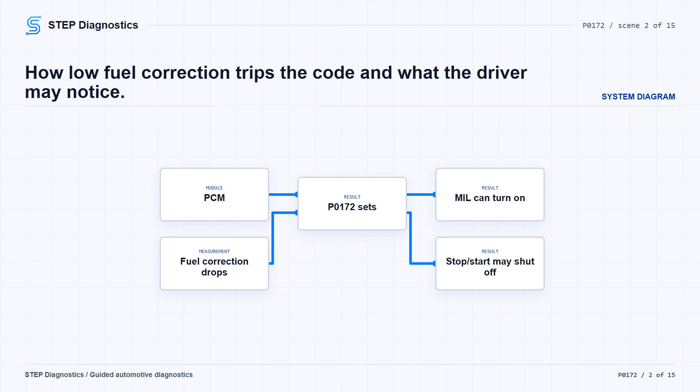Possible fault areas can include fuel delivery, injector leakage, purge flow, air or exhaust restriction, MAP input, oxygen sensor wiring or sensor operation, engine mechanical issues, and only after the diagnostic path supports it, the PCM.

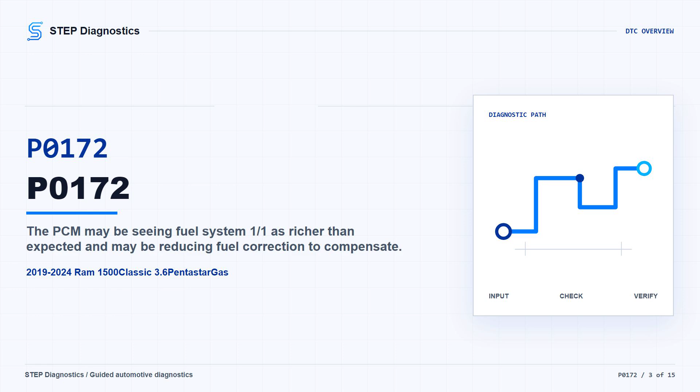The fuel target is based around 14.7:1. For this fault, when the combined short-term and long-term correction drops less than a calibrated threshold, generally 67%, with 100% nominal, the fail timer increments. After 30 seconds of fail time, the diagnostic fails.

Before chasing the rich code, start with the basic system checks. Then start the engine and reproduce the operating conditions that allow this monitor to run. Treat the running conditions as a monitor gate.

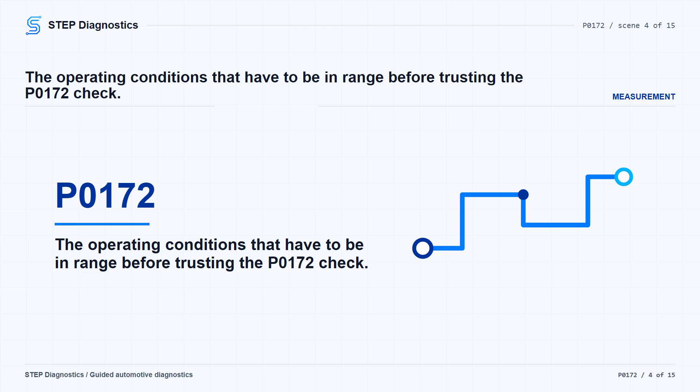Closed-loop fuel control with the engine running, battery voltage above 11.0 volts, barometric pressure greater than 75 kPa, ambient temperature above -7 degrees C (20 degrees F), fuel level greater than 12%, and altitude below 2,590 meters (8,500 ft). Use the scan tool to read and record the codes.

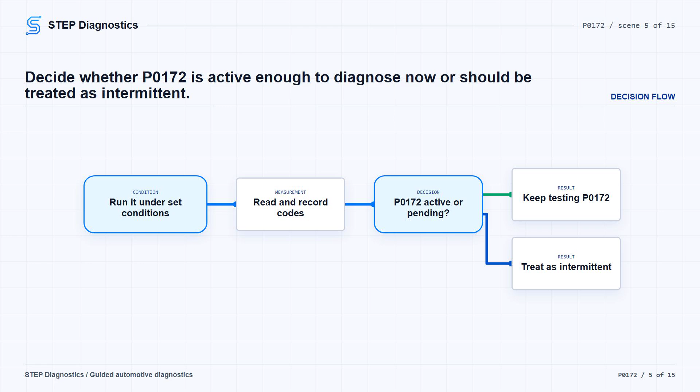It may take a road test, and the best path is to repeat the captured conditions from when the fault originally set. If P0172 is active or pending, continue the diagnostic. If it is not active or pending, handle it as an intermittent condition rather than forcing a hard fault diagnosis.

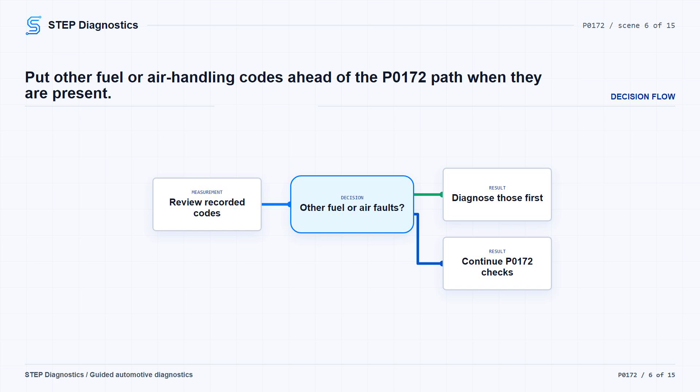Next, look at the recorded codes. If other fuel or air handling faults are active or pending, diagnose those first, because this rich code can be set by a bad oxygen sensor signal or wiring, but it is more commonly driven by a mechanical, fuel, or air handling problem. If there are no other active or pending fuel or air handling faults, continue with the P0172 path.

Now check the exhaust system for restriction. Start the engine, confirm good exhaust flow at the tailpipe, and visually inspect the exhaust for damage that could create a restriction. If you find a problem, make the appropriate repair and verify the repair.

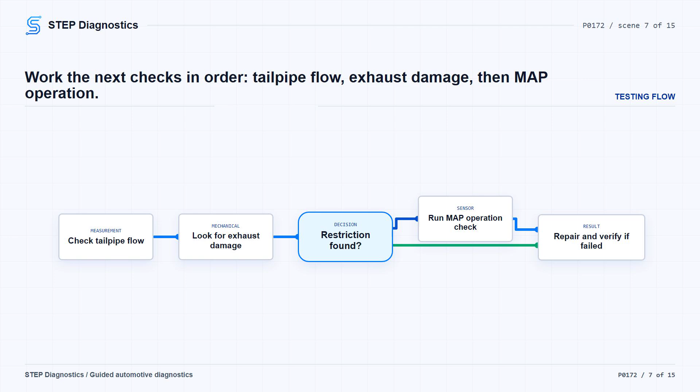If the exhaust checks out, move to MAP sensor operation. Run the MAP sensor operation check. If that check finds a problem, repair it and verify. If it does not, keep moving in order.

With the ignition off, disconnect the hoses at the purge solenoid. Apply 5.0 in Hg to the engine side of the purge solenoid with a hand vacuum pump. The solenoid should hold vacuum for a minimum of 15 seconds.

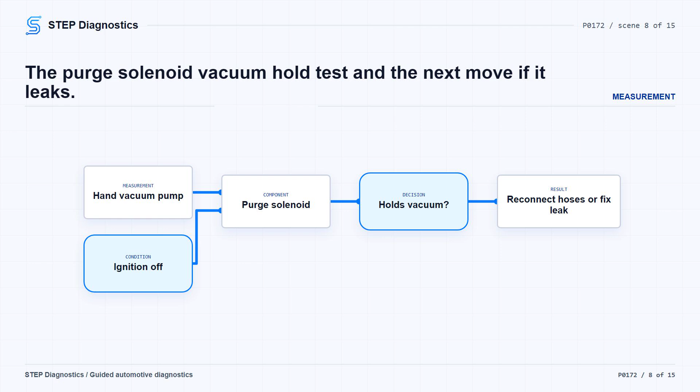If it holds, reconnect the vacuum hoses before continuing and go to the fuel delivery check. If it does not hold, first verify good pin-to-terminal contact at the evap purge solenoid and PCM connectors. If the connectors are okay, replace the purge solenoid, then verify the repair.

Next, check the fuel delivery system. If that test finds a fuel delivery problem, make the appropriate repair and verify. If fuel delivery checks good, inspect the engine mechanical side.

The air induction system must be free of restriction, valve timing and compression must be within specifications, and the fuel must be free of contamination.

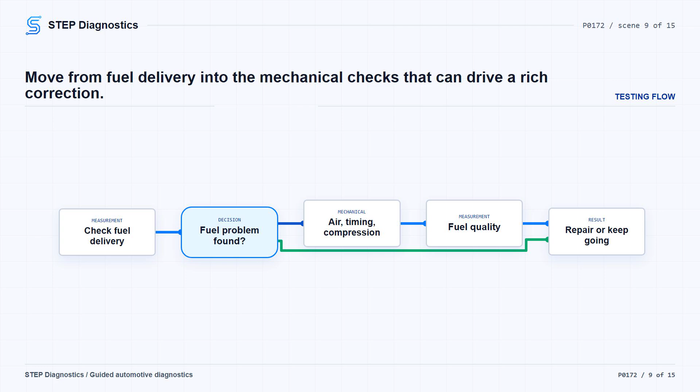If an injector is suspected of leaking or having an abnormal spray pattern, remove the fuel rail with the injectors intact, energize the fuel pump to maintain rail pressure, and check for leakage before actuating the suspect injector. Then actuate the suspect injector with the scan tool, inspect the spray pattern, and compare it with the others. If you find a mechanical or injector-related problem, repair as necessary and verify.

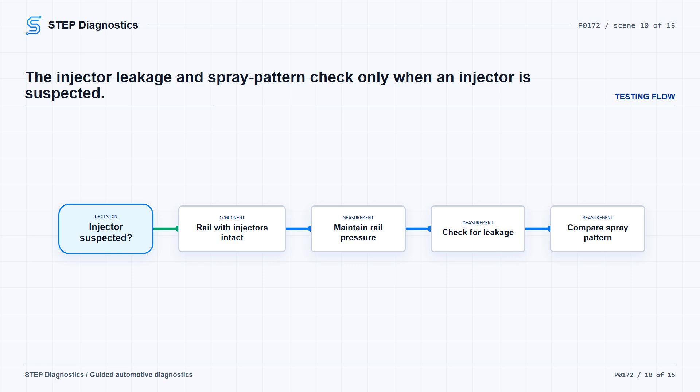If no engine mechanical problem is found, continue to the oxygen sensor circuit checks. For the upstream oxygen sensor wiring check, disconnect the upstream O2 sensor connector and the PCM C2 connector. Do not back-probe the PCM harness connectors. Back-probing those connectors can damage the PCM terminals and create poor terminal-to-pin contact.

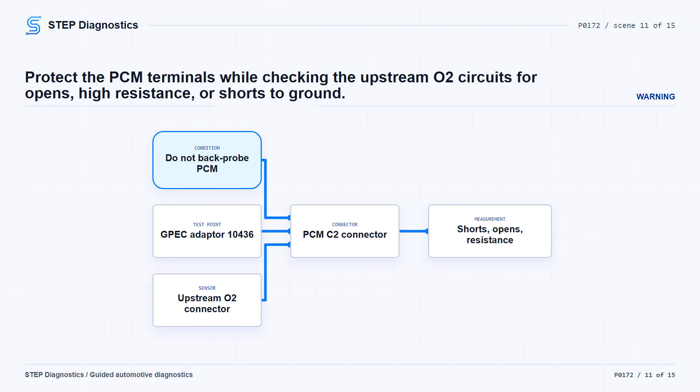Use the GPEC diagnostic adapter 10436 for the diagnosis, check the upstream O2 sensor circuits between the sensor connector and PCM-C2 for a short to ground and for an open or high resistance. If a wiring problem is found, repair it and verify.

If the wiring checks good, run the oxygen sensor operation check. If that finds a problem, repair as necessary and verify. If it does not, move to the related harness connection inspection.

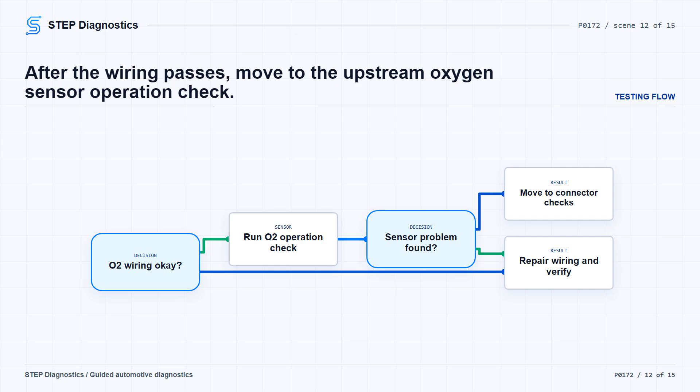At this point, disconnect all PCM harness connectors, all related inline connectors if equipped, and the related component connectors. Inspect the harness and component connectors, including male and female terminals, for poor installation, damaged locks, corrosion, water intrusion, seal damage if equipped, bent terminals, signs of overheating, push-back terminals, spread terminals, and poor terminal tension.

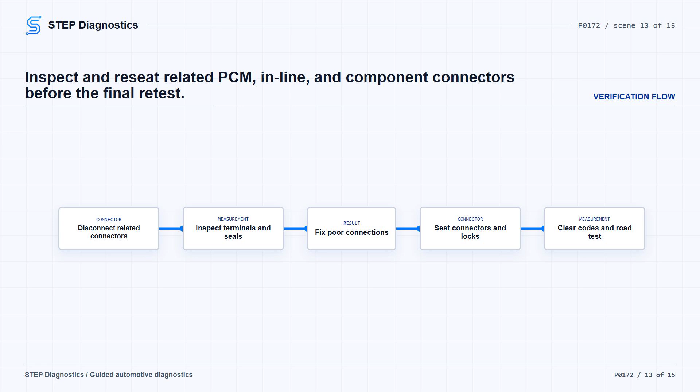Repair any conditions found, then reconnect the PCM connectors, inline connectors if equipped, and related component connectors, making sure every connector is fully seated and every lock is engaged. Erase the codes, operate or road test the truck under the monitor conditions and read the codes again.

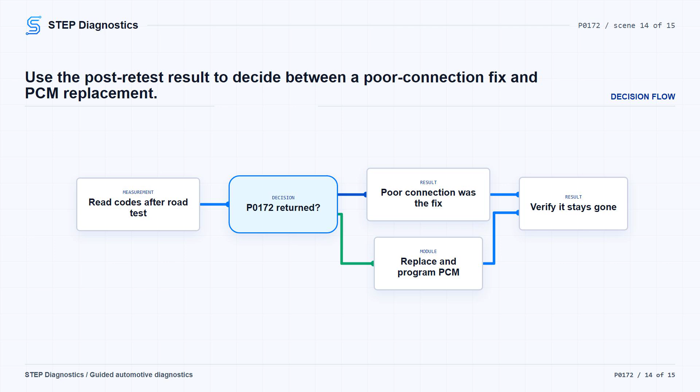If P0172 returns after this path, replace and program the PCM, then verify the repair. If P0172 does not return, treat the poor connection repair as the fix and verify the code stays gone.

Keep verification separate from the testing steps. Anytime the path leads to a repair, clear the DTCs, run the truck under the conditions that allow the monitor to complete, and confirm P0172 stays gone.

The takeaway is simple. Prove the rich condition is active, rule out related fuel and air handling faults, then work through exhaust flow, MAP input, purge leakage, fuel delivery, mechanical condition, injector behavior, oxygen sensor wiring, oxygen sensor operation, and connector integrity before condemning the PCM.